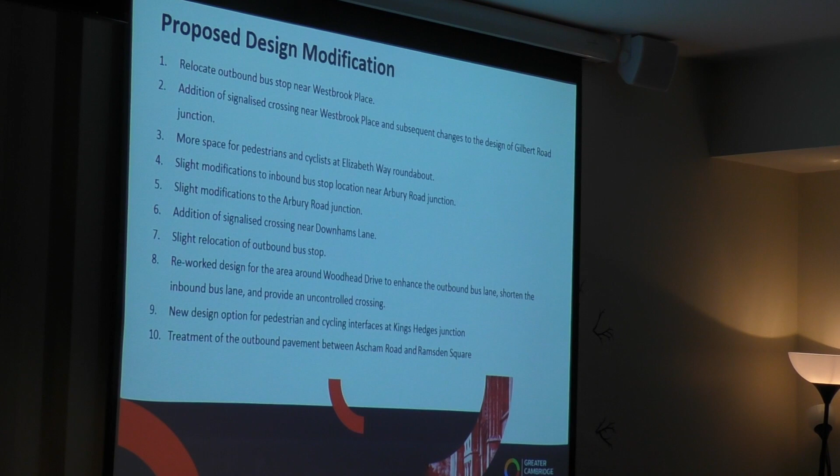In terms of the question that we asked about the location of the crossing near Westbrook Place, we got a mixed response on that, but we've had a lot from the discussions. We decided that it is advantageous to put a crossing in that location, so the design team tried to do that, and you'll see that on the plan.

A big point that was raised was regarding the Elizabeth Way roundabout and giving more space to cycling and pedestrians around the edges of the roundabout, and we've addressed that as you'll see in the plan. We want to discuss that in groups, because on one corner of the roundabout it does mean we have reduced the width for traffic from 2 lanes to 1 lane.

That may have a slight impact on traffic queuing, but we'll raise it in detail when we discuss. We've got slight modifications to the inbound bus stop near Arbury Road based on driveway access, and slight modifications to the Arbury Road junction. There are a few options we're looking at, which Livio will explain in more detail. We've also got addition of a signalised crossing near Downhams Lane, as that was the preferred location for that specific question we asked.

We've had to slightly relocate the outbound bus stop in that area as well, because we found it was near a building of local interest where we placed it previously, so we've addressed that issue. We've reworked the design for the area around Woodhead Drive, including an additional uncontrolled crossing, which you'll see on the plan and be able to feed back on. In doing that, we've lengthened the outbound bus lane and shortened the inbound bus lane slightly.

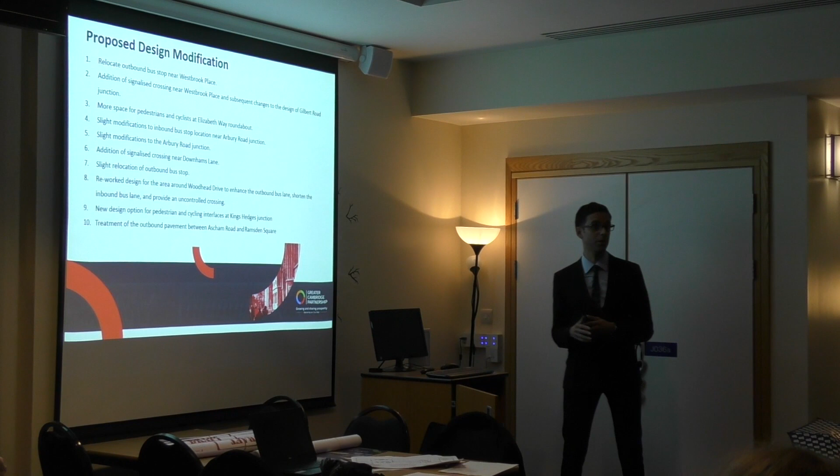Good evening everyone. Some of you might have seen me before because I attended the tree workshop, but my name is Livio Martelli, WSP. I'll be taking over the detail design stage, so I don't have the full history of this stage of design, but I'm collecting and gaining as much information as possible. I want to go through all these items that Paul highlighted.

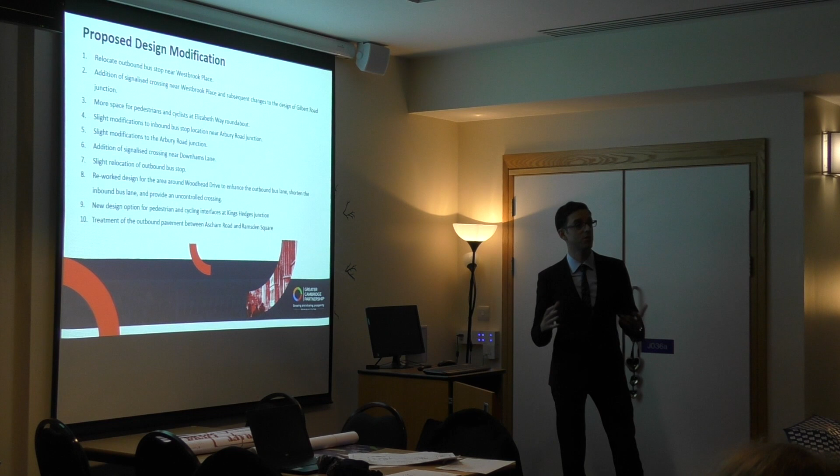But there will be changes that are effectively quite minor. They're a result of the consultation. There's not too much really to discuss, it's just more a presentation. There are some specific items I'd like to discuss with you in more detail, get your views and ideas, and that's the reason why we're going to have a separate workshop afterwards. So I'll try to highlight the specific items we want your feedback on.

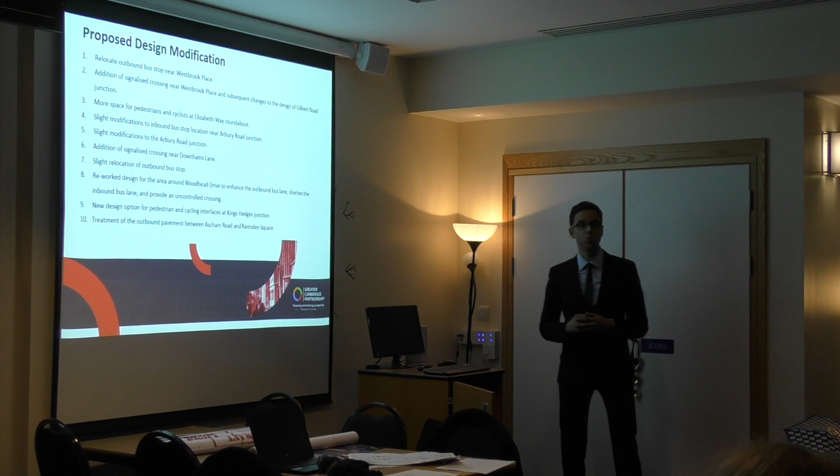So if we start from the first one, Westbrook Place. What we've done here, as Paul mentioned, we relocated the bus stop. It was to the south of Westbrook Place, and we moved it to the north. The reason why we did it was there was some strong opposition to the previous location, but the advantage from an engineering point of view is, as you can see, there are fewer accesses, so it's a better place for a bus stop.

Then we have introduced a new signalised crossing that you can see there. This is also as a result of the consultation. The crossing is for pedestrians only because unfortunately there's no space here for a toucan crossing. As you can see to the north, that's the area where all the shops are, and it's recognized as an area of potential conflict between pedestrians and cyclists. Obviously you're going to have quite a lot of pedestrians there, and cyclists have potentially other routes as well, because they could use the bus lane, or the fast cyclists could use the road. So we want to provide a facility there for more vulnerable cyclists.

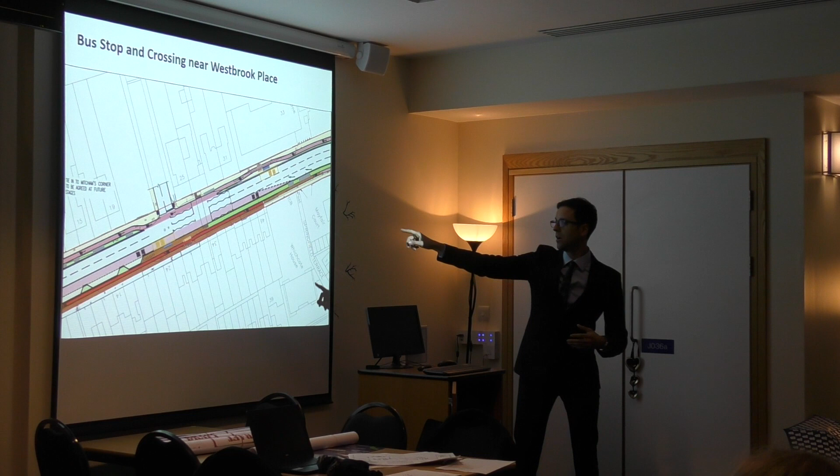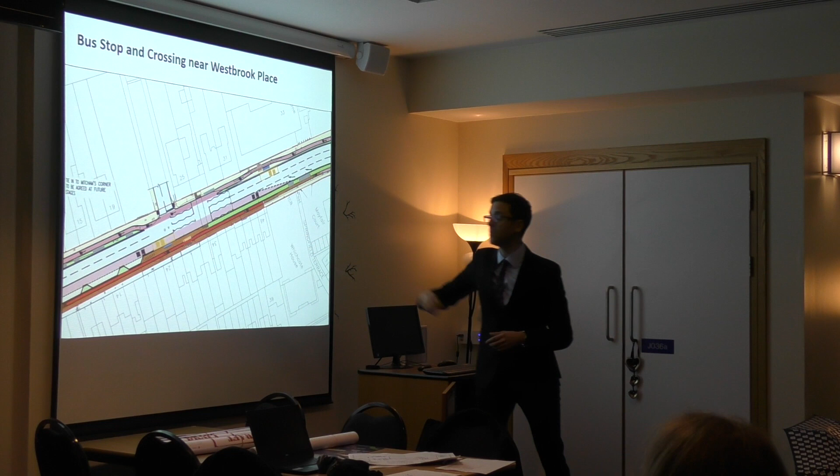So we've got a bus lane, and a cycle lane that's going to be at the same level as the footway, all in block paving, so it will be rather attractive. Could you tell us which colour symbolises what? What's the red stripe? The red here is the cycle lane. And the brown is pedestrian. So what is the red line different to the pink line? Pink line's bus.

The red line, effectively, we want to create two potential routes for cyclists. We're going to have fast cyclists at this location - they could use the bus lane if they want, because it's quite wide and most of the time you don't get buses in it. And then you've got more vulnerable cyclists at this location, who will be using the cycle lane.

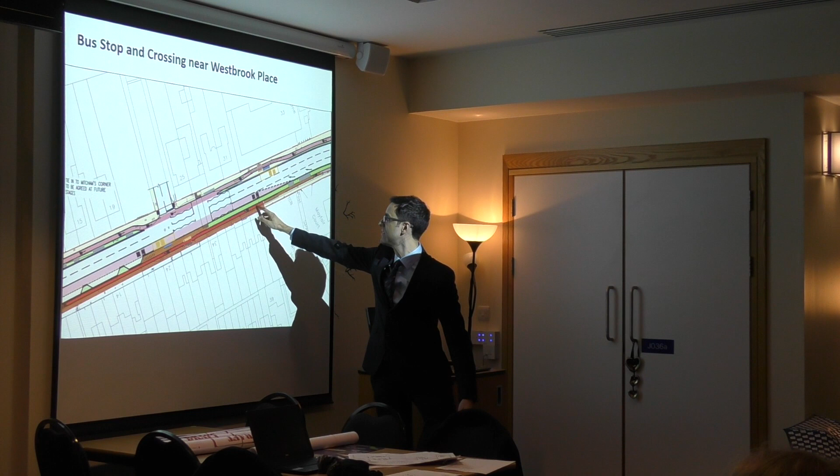So this is a different material. It's going to be block paving, more attractive and more suitable to that location. That's why it's a different colour.

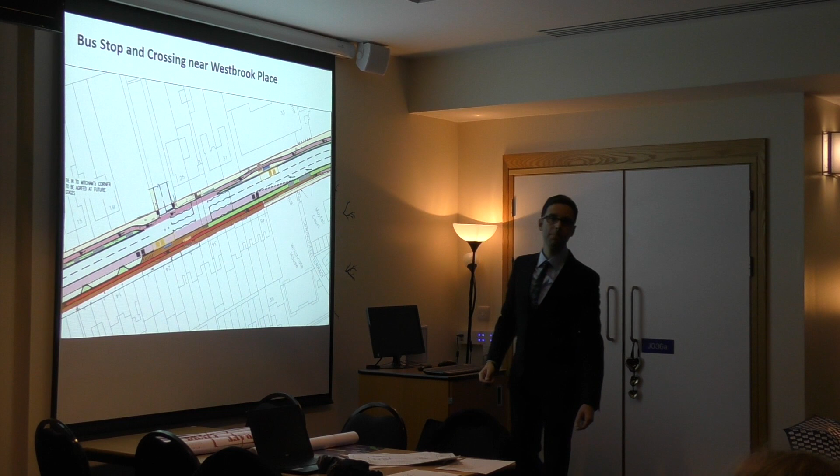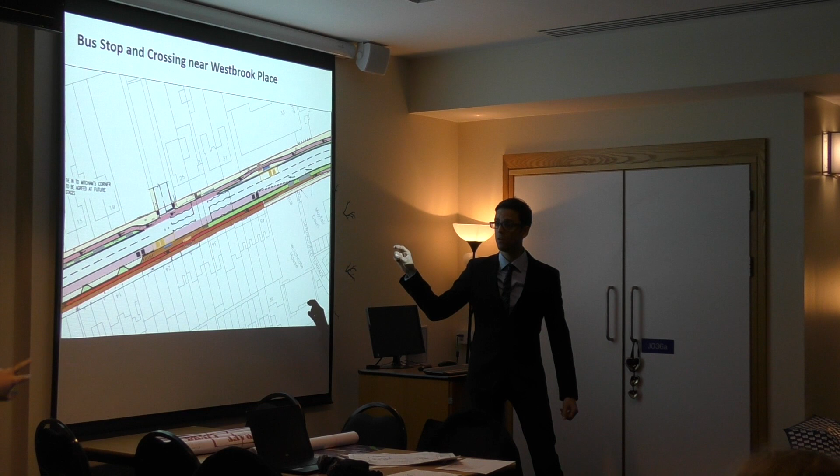What's the sort of scale? What kind of widths are we looking at in metres for these different lanes? For the cycle lane, it's about 1.5 metres, with local reduction to 1.2 at the pinch points where we have the bus stop. And is the pavement for pedestrians the same width?

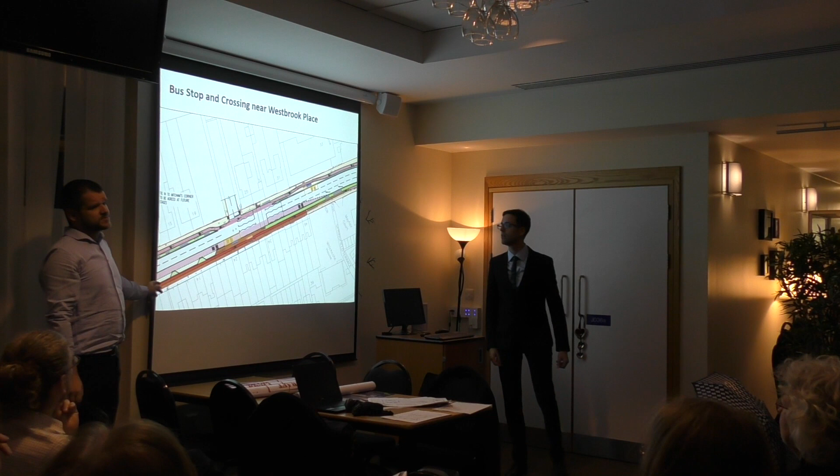Now, this is kind of different areas - difficult question, should we explain this when we get to the table? Minimum width is up to 2 metres for pedestrians, but there is the short frontage here which we cannot design on because it doesn't belong to the council - it's the highway boundary limited.

Sorry, could the gentleman speak up? We can't hear you at the back here. Can you throw your voice more, please?

So this cycle lane is on that same level as the footway. We're using two different colours because that's going to be a different material than, for example, here on the northern side. So we are going for block paving type material.

The width of the cycle lane is 1.5 metres along this section, and we have a half metre buffer zone from the parking space. The pedestrians have a minimum of 1.8 metre footway here, but there is much more space available, though we do not control this land. That's why we're showing this as a 2 metre section only at the moment.

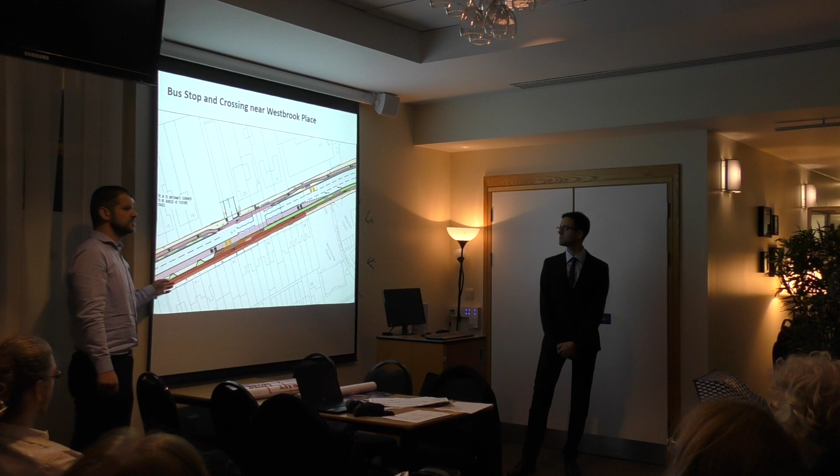So what I said is correct. In this specific area, coming down from the junction past the shops, we recognised through our discussions that this area has quite a lot of conflicts in it. You're going to have pedestrians trying to come from the shops, going to the parking spaces, people crossing the cycleway.

So we can't put a fast cycleway through this area. We need to somehow try to calm the cycleway. We're just trying to come up with ideas for this specific piece of cycleway, where there's quite a lot of conflict, to try and calm it slightly, to make sure we're not having cyclists riding down there at 20 miles an hour, for example. Which is a difficult thing to do, and it's kind of a result of switching the cycleway from the carriageway, where we previously had it between the busway and parking, which is also not ideal.

So on this side, we are achieving a cycleway which is separated from the road and is a facility for everyone to use, but we need it to be slightly calmer because we recognise there are a number of conflict points in that area. So we need to move on - we can discuss this around the tables further. We'll be walking around the tables.

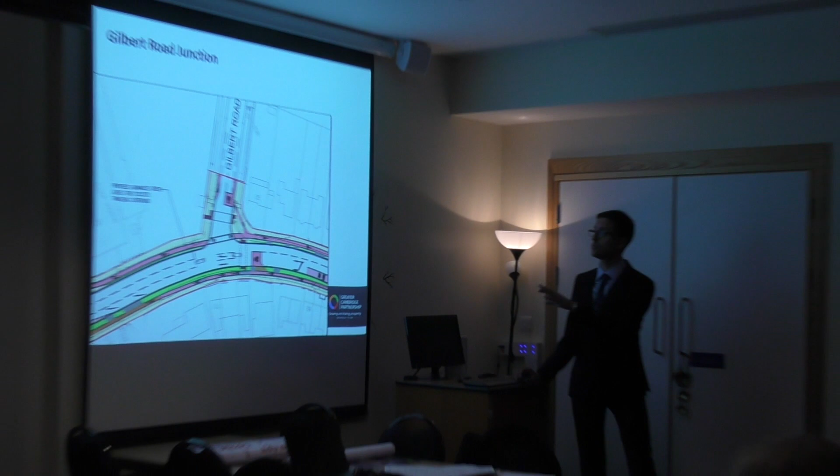Okay, so let's move on to the next one - it's Gilbert Road Junction. So the signalised crossing that we had has been moved onto Westbrook Place. This creates much more space within the junction for pedestrians and cyclists, so we can achieve a wider pavement on this side, which in the previous design was a pinch point. We have dedicated separate facilities for pedestrians and cyclists, with dedicated crossing points for cyclists and pedestrians here.

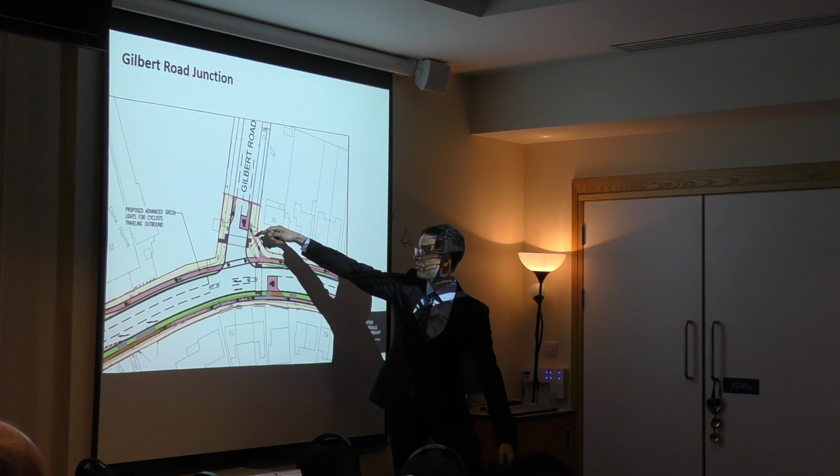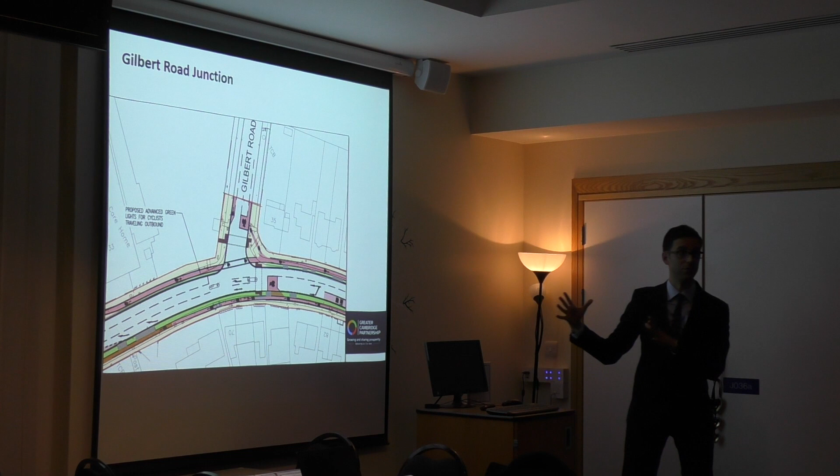The conflict areas are for pedestrians and cyclists wanting to turn left, so there's a potential conflict area for pedestrians here. We're considering some options here, so it'd be good to have your feedback on this. One of them is a shared use - having a small area of shared use for cyclists turning left.

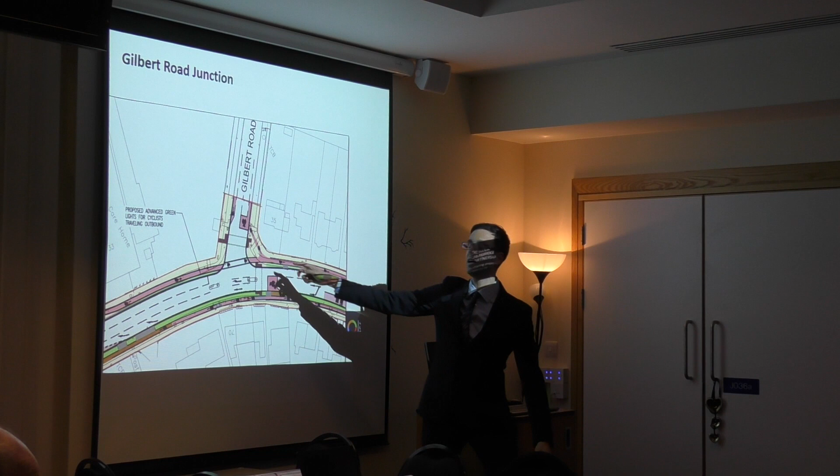Obviously, nobody likes shared use. But the alternative is having this approach here where pedestrians effectively need to cross the cycleway twice to get to the crossing. So it might be that in this situation, shared use is the best solution.

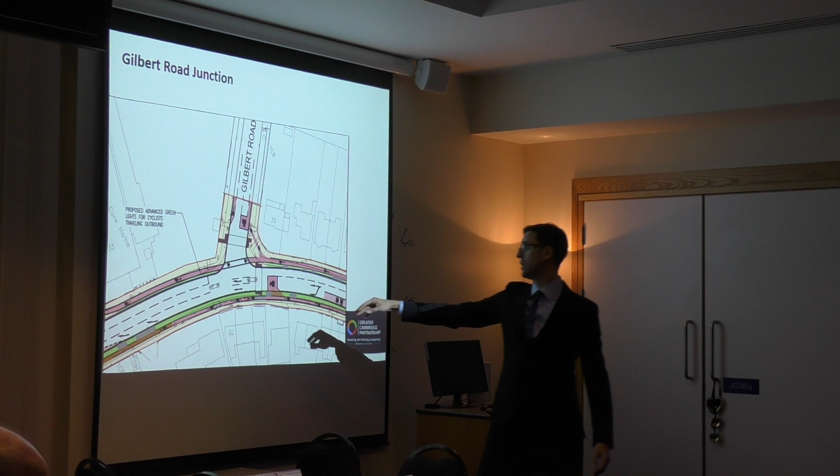But if you've got some ideas, please let us know. For cyclists wanting to turn right on Gilbert Road, they will have to join the carriageway and use advanced stop lines. Similarly, cyclists coming down from Gilbert Road will be able to join the cycleway here. It's not shown on this drawing because it's still work in progress effectively.

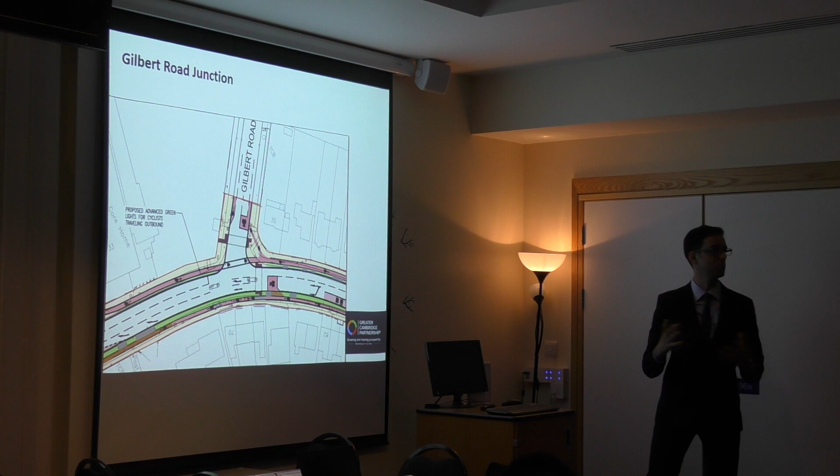So here I can only see positive improvements. I don't think there's too much up for discussion, but obviously if you've got any questions we can discuss it later.

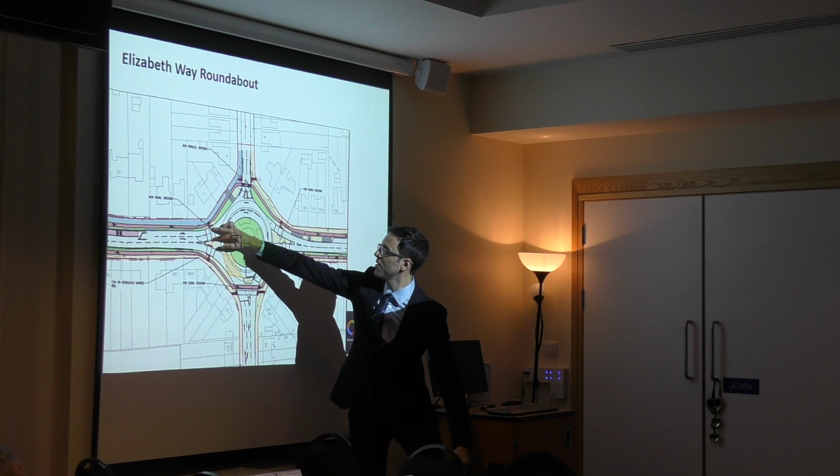Now, Elizabeth Way roundabout - the main issue was trying to address conflicts between pedestrians and cyclists. So what we've done is removed the ability for two HGVs, two lorries effectively, to use the roundabout at the same time alongside - one going straight and one turning right, which is quite normal in Cambridge. So pretty much everywhere else in Cambridge, an HGV will have to use other lanes in order to turn right. I don't think it's a major issue. We discussed it with the safety team and they accept this.

By blocking and restricting these movements, we created more space for pedestrians and cyclists because we could widen the pavements.

Similarly, we're now looking at the option of removing the left turn facility from Milton Road going down to Elizabeth Way. This would remove the pinch point at this location and allow us to have a segregated cycleway. In the previous version of the design, we had shared use areas. Now we've removed all shared use areas apart from this section, which we'll talk about later - introducing segregated facilities and segregated crossings for pedestrians and cyclists.

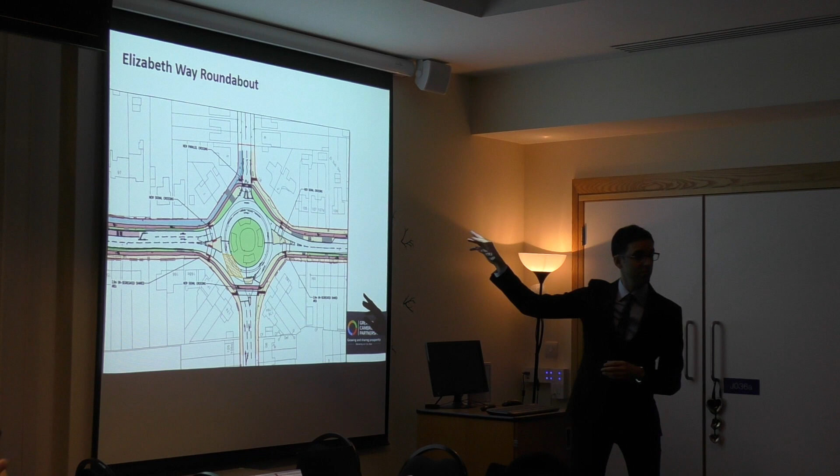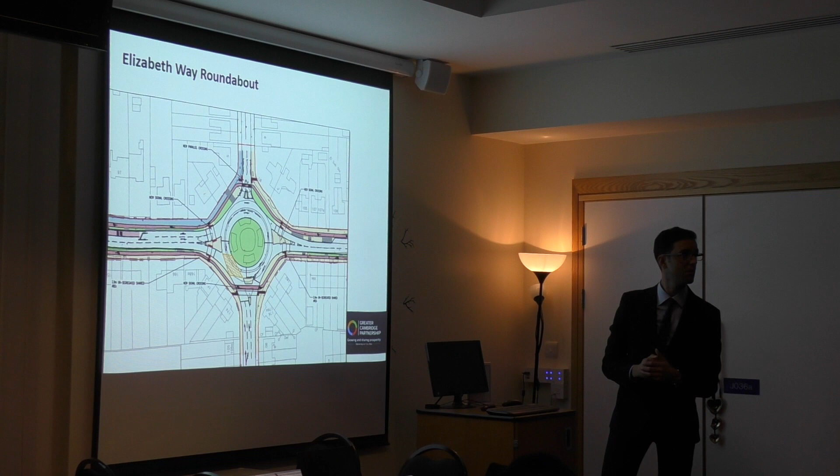We discussed this in the workshop around tables. We've got to move this through, because if we spend all our time talking here, and the acoustics aren't great, it's better if everybody is at small tables and the officers can come around and answer questions - that way we get through the information more quickly. It's important that we get a record of what people say, so keep going.

So, Arbury Road Junction - some minor changes here, nothing major. We've moved the bus stops slightly, as Paul suggested, just a few meters, and we rationalized the alignment of the cycleway.

I think the only item for discussion here is the potential interaction between cyclists and pedestrians at the crossing point. In this design we're providing separate crossing facilities for pedestrians and cyclists. However, there's a risk that if it's green for both pedestrians and cyclists, turning left might create a conflict point between the turning movement and pedestrian crossings. So we're recognizing there's a potential issue there, and we're looking at various options.

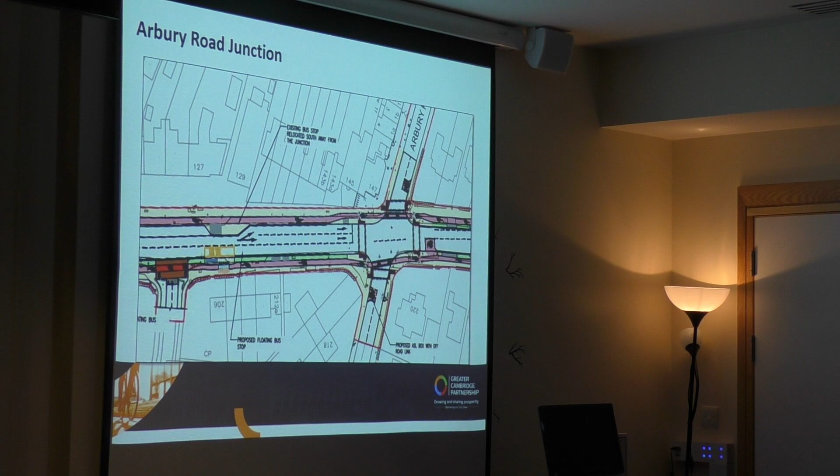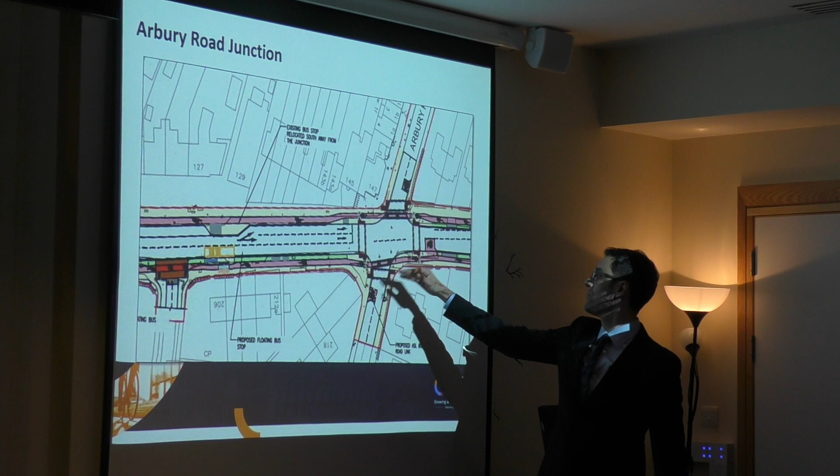One option could be to effectively block the left turn maneuver for cyclists, making it illegal. So cyclists could only go straight, and in order to turn left, they'd have to use the advanced stop line.

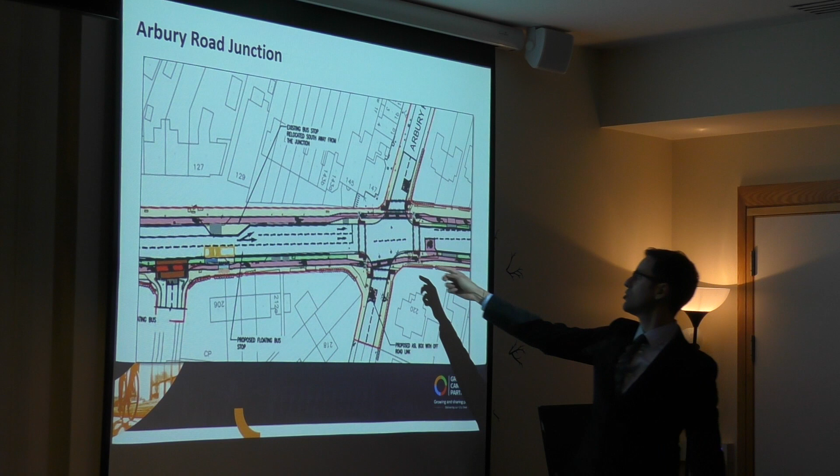Alternatively, they could use a shared use here, or the second option is to introduce Toucan crossings, effectively a crossing for pedestrians and cyclists. That way you eliminate the risk of cyclists turning left, which can have a conflict with pedestrians.

But do you mean the scramble? Are you keeping the scramble? Sorry, let's just allow him to keep going, because otherwise we're going to be here all night. We'll discuss this around the tables in a bit more detail. Please keep going.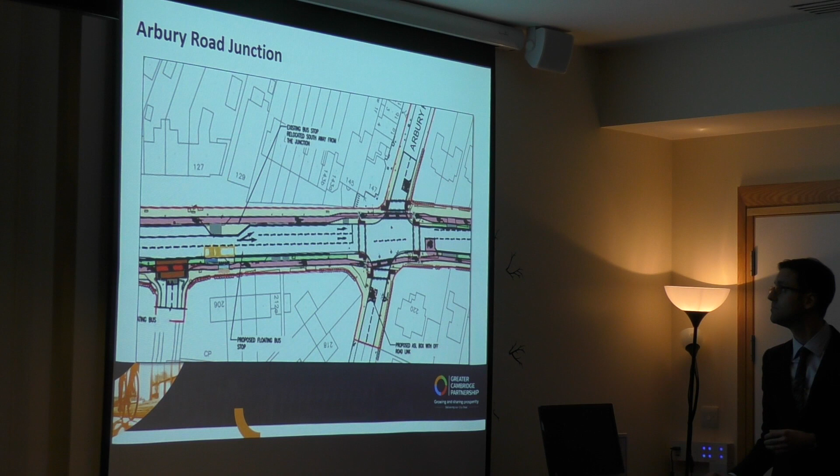On this, we're effectively introducing a new signalised crossing, as Paul mentioned, at Downham's Lane, with some minor changes to the proposed floating bus stops, as Paul discussed. No major changes other than what I just mentioned. So the new crossing at Downham's Lane was the result of the consultation.

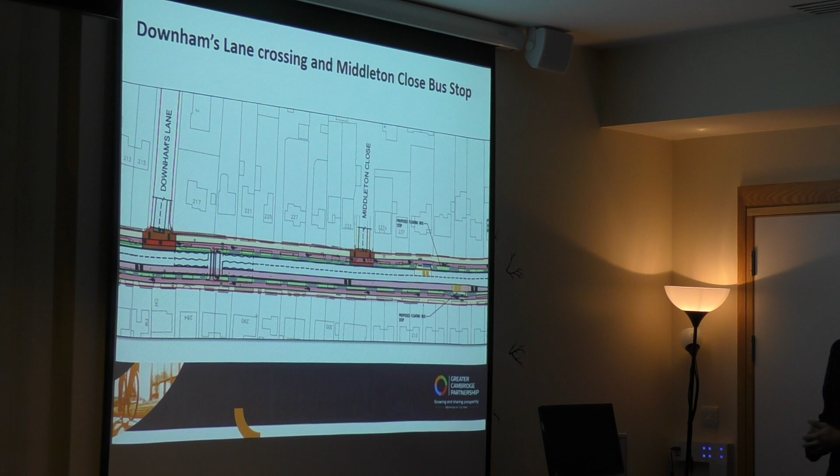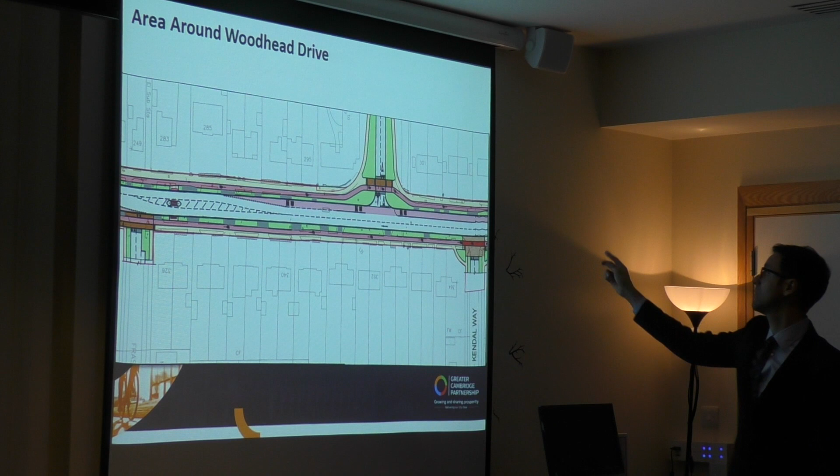And going down to Woodhead Drive, we are introducing a new uncontrolled crossing. You can see there is an existing uncontrolled crossing, and the proposed one is going to be a lot wider. By doing this, we're trimming the inbound bus lane, and at the same time extending the outbound bus lane, to improve journey time for buses travelling outbound.

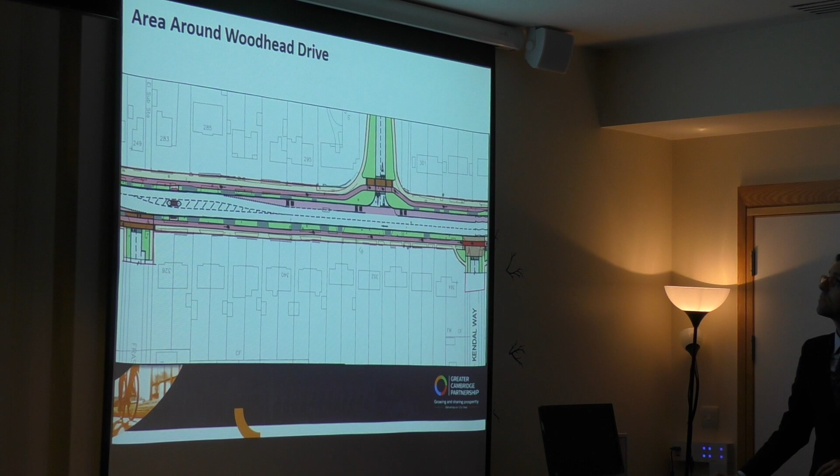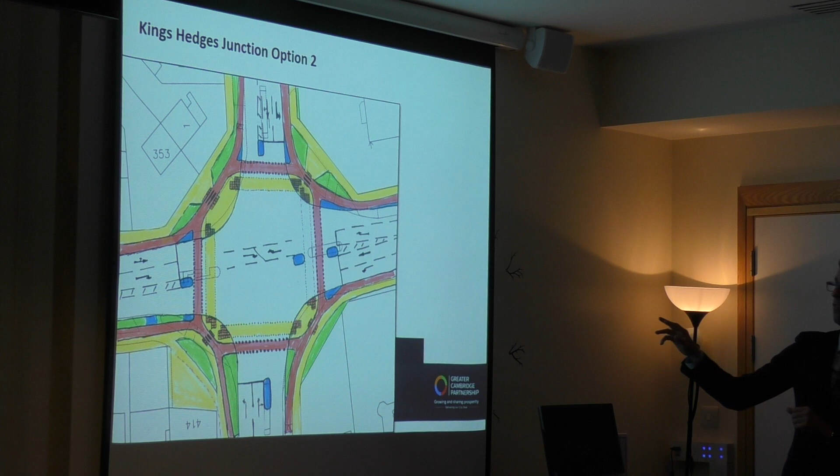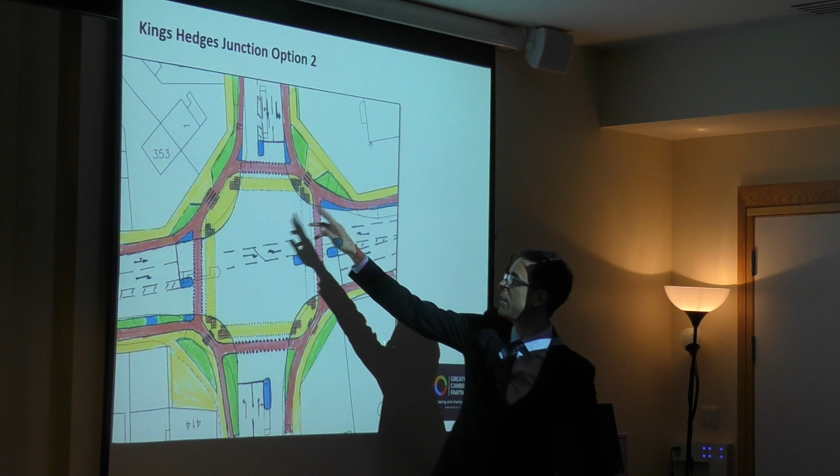You can see here the benefit of this design is that for pedestrians, in order to cross diagonally, they don't need to cross the cycleways too many times, as opposed to the other design, where you have to cross the cycleways more times. But the downside is that you increase the length of the crossing because pedestrians are crossing the inside of the junction.

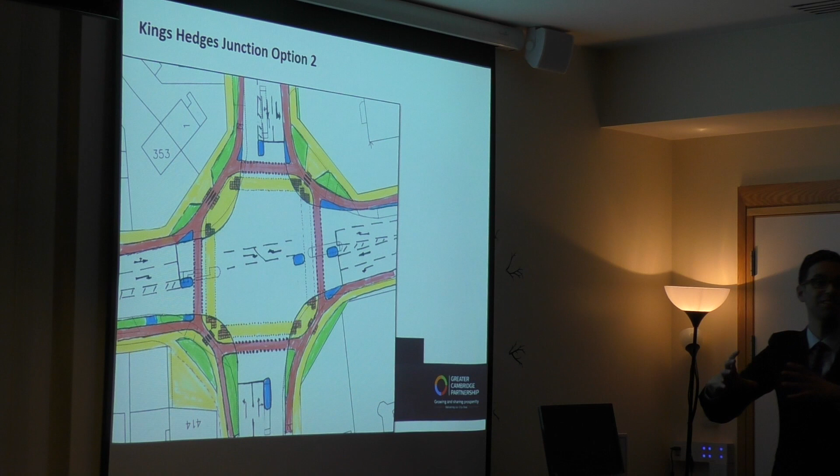The last item for discussion is the shared use between Ascham Road and Highworth Avenue. There are a number of safety concerns in relation to shared use, to do with the fact that cyclists are travelling quite close to the properties, and there are issues with visibility, and as you're coming out of a side road at a junction, you don't expect cyclists coming from both directions. So there were some safety issues in relation to shared use, and we're now considering reducing the extent of the shared use.

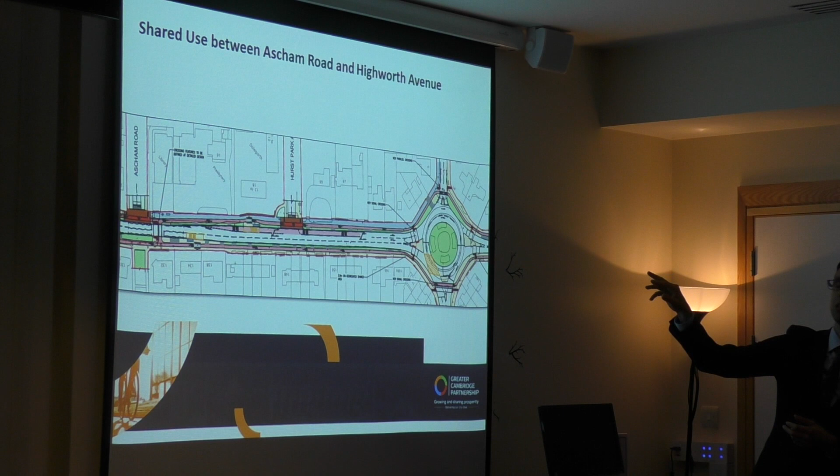Sorry to interrupt, I don't understand - the brown and the red? In the picture, the blue one is the shared use facility. We retain an outbound cycle lane, which is the pink, and then the pavement between the cycle lane and the properties is approximately 3 metres wide, a shared use pavement. So is that the greyish blue thing? And on the junction, sorry to show ignorance, but what do the red things indicate? There seem to be two red oblongs and a kind of brown oblong. They are the Copenhagen style crossings.

Let this be the last question, please. Okay, move on - yeah, I mean you can discuss. So this was the last slide.

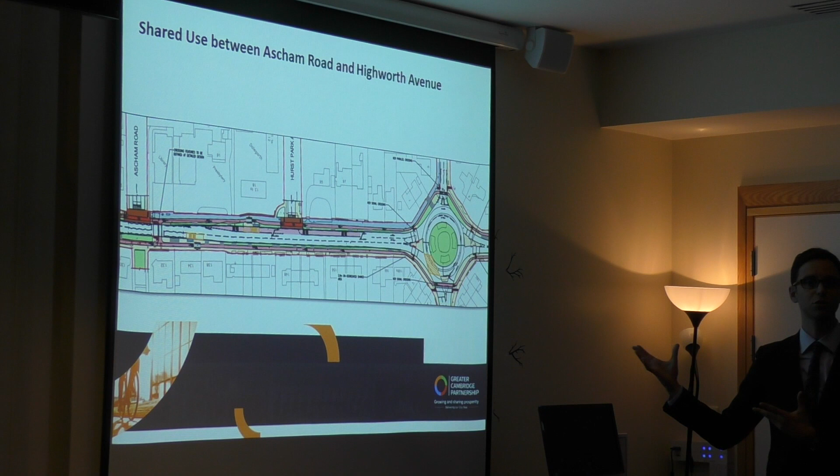It'd be good if you could try and focus, because there are many things potentially for discussion, but most of this was a presentation of where we got to, an explanation of what we did to address the designs. Some elements still need to be discussed and decided. So if I can get your view particularly on these two options for the King's Hedges junctions, because we haven't decided it yet, and on your view on the shared use area as well, to Ascham Road. It would be good to get your view on the type of crossings at the junctions I discussed earlier, and the potential interactions between pedestrians and cyclists.

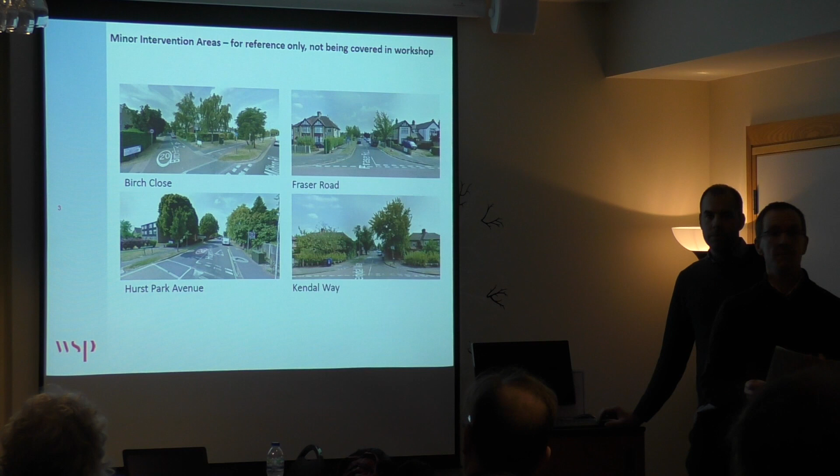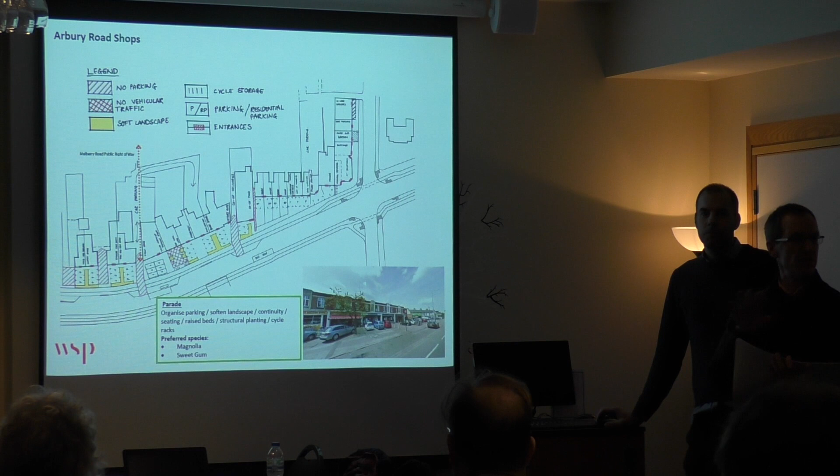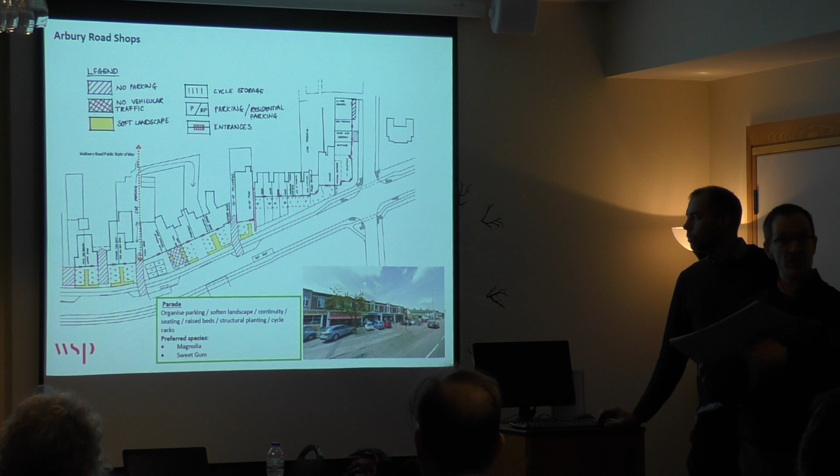There's a third category of landscape areas, which is not part of this workshop, but we thought we'd advise you that we are working with the Arbury shopkeepers and landowners, and subject to their buy-in, have produced a preliminary landscape design that will provide enhancements to that area and try to rationalise what's currently quite a broken up and disparate set of arrangements of all different shops. The idea is that that will tie in seamlessly with the public realm design, so that there aren't any forgotten little spaces between cycleway, pedestrian, and the thresholds of the shops, for example. So that will all work as well.

Coming on to the site-wide objectives, the avenue of trees along the entire length of Milton Road has been subject to considerable previous consultation. The green boxes on all of these slides are the summary of what our understanding is of you as the stakeholder, what your preferences have been to date. So we're taking those on board, combined with the latest engineering designs, to come up with our proposals.

One of the things we'll particularly be looking for your feedback on is the overall choice of species. We've put 2 groups of species based on where we're looking closer to the city centre - there'll be one group of species - and then where the carriageway is wider, we've got more room for larger species. That's the broad distinction between those 2. Hopefully those lists will be familiar to you from those of you who've been in the previous workshops.

We're hoping that will become a defining characteristic of Milton Road. We're proposing that the colour scheme for the landscape materials will be warm dark tones and a matte finish, partly because we've noticed that lighter tones can start to show signs of wear quite quickly. That was one bit of feedback that I picked up along the way.

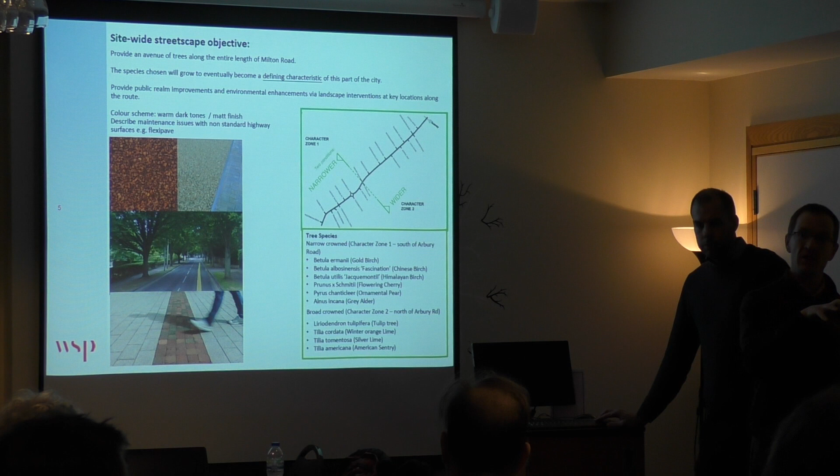That surface will be laid down over those to allow irrigation and aeration and promote the health of both existing and proposed trees. However, please be aware that those interventions are likely to be a small percentage of the total length of footway or cycleway along the entire route, and will be targeting specifically around trees that are potentially within a metre or 2 of the trees.

We've got an isometric section to illustrate the kind of tree protection measures that we think are appropriate. In this case, we're suggesting a product produced by a company called Green Blue Urban, which is a soil cell system that reduces compaction of the soil and promotes health for tree roots, aeration of the tree roots, and also allows easier irrigation. You can see on that cross section at the bottom how that could be laid under the cycleway and footway so that the rooting zone is not predominantly lateral along the green verge, because we feel that might affect the overall stability of the tree if the roots are growing laterally and not allowed to spread in as many directions as possible.

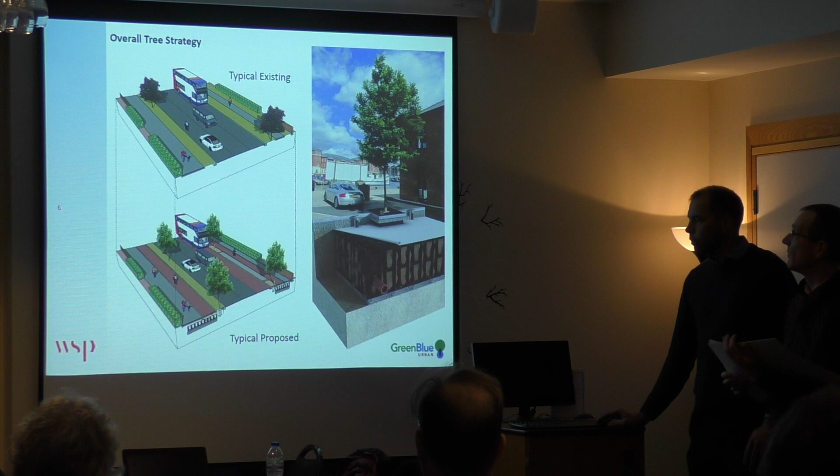The first intervention area, we took on board what you said about a book theme, potentially providing some seating, and some of the other precedents that we looked at.

We identified the importance of the scholar tree, Sophora, I think is its Latin name. These trees are dotted around Cambridge, but this one particularly provides such a strong character already. The design we've come up with seeks to enhance that rather than replacing the tree or planting other trees in proximity to it.

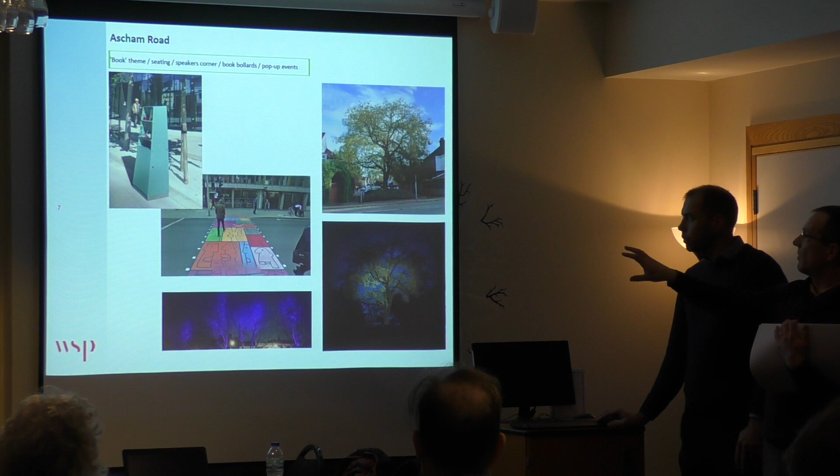We've also considered potentially uplighting the tree and using certain treatments that might make that space a destination in its own right, rather than two sides of the road segregated by a busy highway. That's just an example of that.

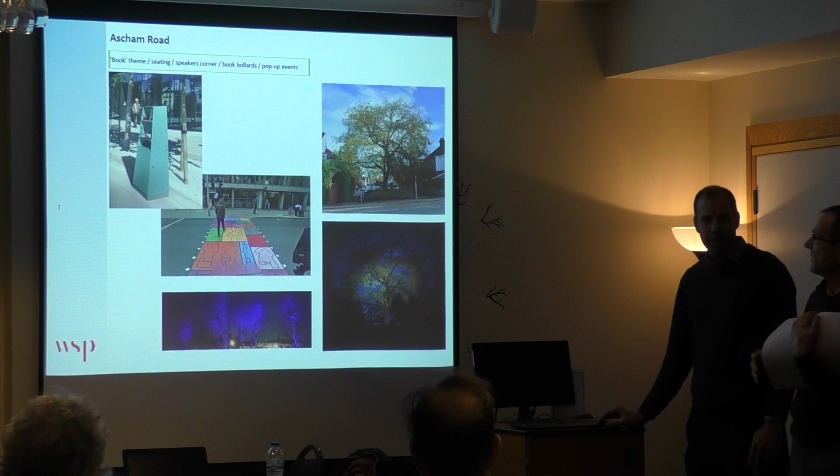So, subject to discussion tonight, the crossing pattern is an example - that's I think near the Tate Modern. That was the landscape design for that, where we've come up with a way of unifying the space. The multicoloured crossing shows the spine of some books, with the theme of the scholars.

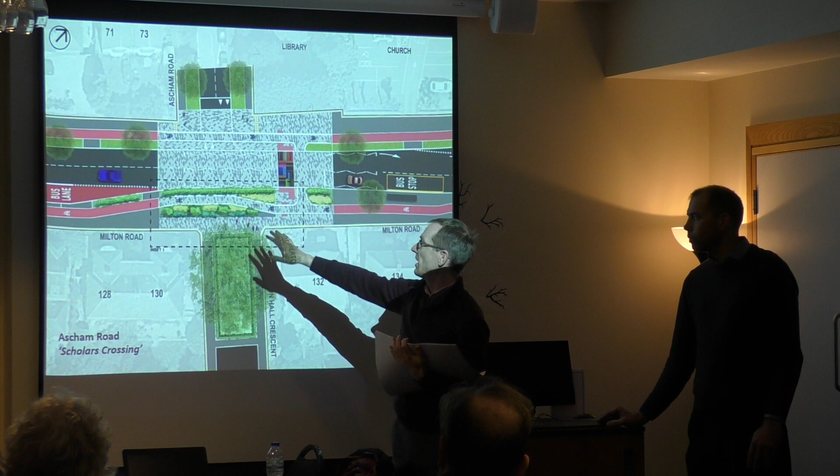We've come up with two options for this, and we're hoping you will choose one or the other. The major change you'll see in the handout is a slight deviation in the cycle route to enhance this space. So there's a segregated cycle route option and a non-segregated option which runs straight through there.

We're also hoping for your input into looking at where seating could be provided in this design, and potentially other bits of street furniture that could include locations for public art, cycle storage, and such like.

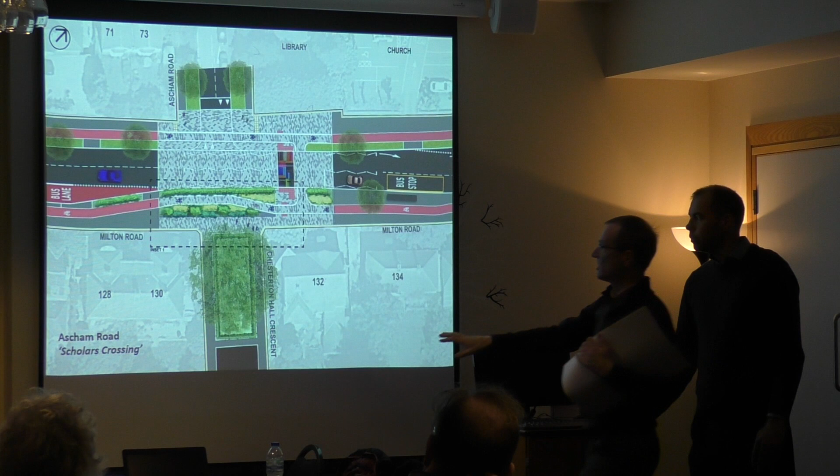Our proposals for the bed underneath the tree - currently a dwarf wall with rather overgrown, scruffy looking shrubs on it - is to provide a hedge with very small leaves, such as yew, which can be closely clipped and maintained at different heights, potentially unifying the space by being allowed to grow to the same height. It would be a trick of the eye.

Because at this point you've got a wall that needs to be quite high, whereas at the other end it's just a really low wall, so the hedge could become wide and high all the way through, with the advantage of also screening the ground underneath the tree.

We don't know how well, if we were to plant the hedge in future, it would grow because of the shade. But if you did plant the hedge right around the edge, it could be successful.

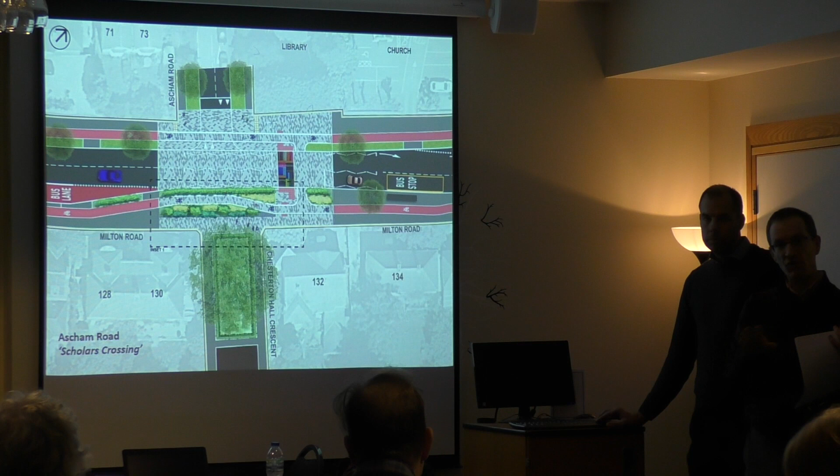We're also suggesting that the existing shrubs in that area are completely taken out, and that area is just grass below them. But we'd also suggest that underneath that hedge we plant some non-vigorous ivy, and perhaps some other bits of ground cover, just to neaten the overall appearance and potentially colonise that grass space.

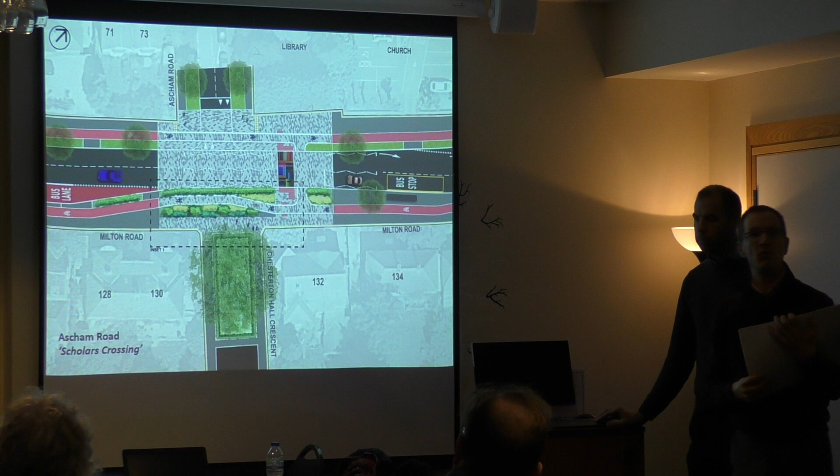So that we can identify which species are the most suitable for that area - if the grass doesn't take, perhaps the ground cover and ivies will at least cover over the bare soil, improving the whole appearance of that area.

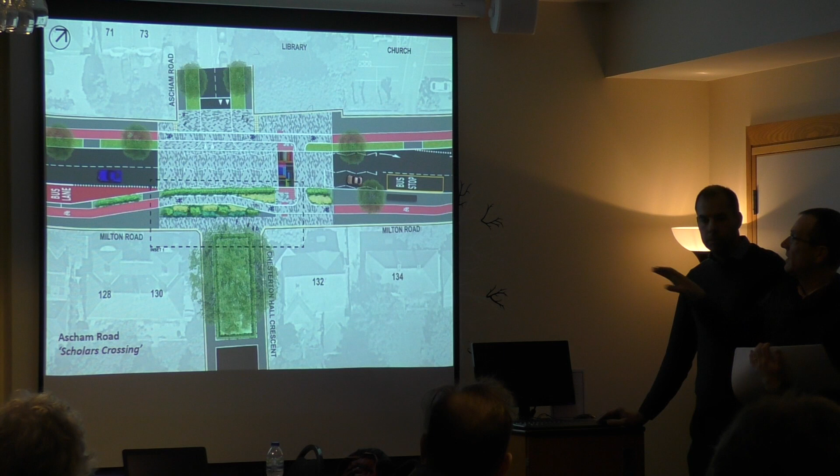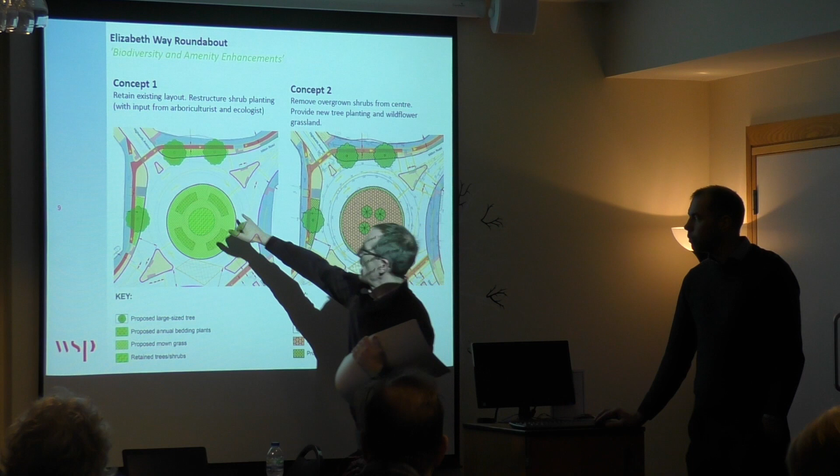We've just about made out the previous beds of annual plants placed there and the internal area, shrinking it down so the geometry is quite formal and symmetrical. The only change in Concept 1 would be to restructure the shrub planting in the middle of the roundabout, in consultation with arboriculture and ecology teams, to ensure it has the best value in both those areas.

That may be as simple as thinning out a few specimens, or working out the life expectancy of the shrub planting there. Because we haven't been in there, we don't know what we've got, but we know it has biodiversity value, and that's feedback you've given.

Concept 2 is quite a radical redesign where we're taking out that shrub bed and planting some multi-stemmed trees in its place, and providing wildflower grassland across the roundabout, apart from a strip of mown grass right around the edge. That would have biodiversity benefits as well as reducing the maintenance burden of the annual bedding plants and the grass mowing.

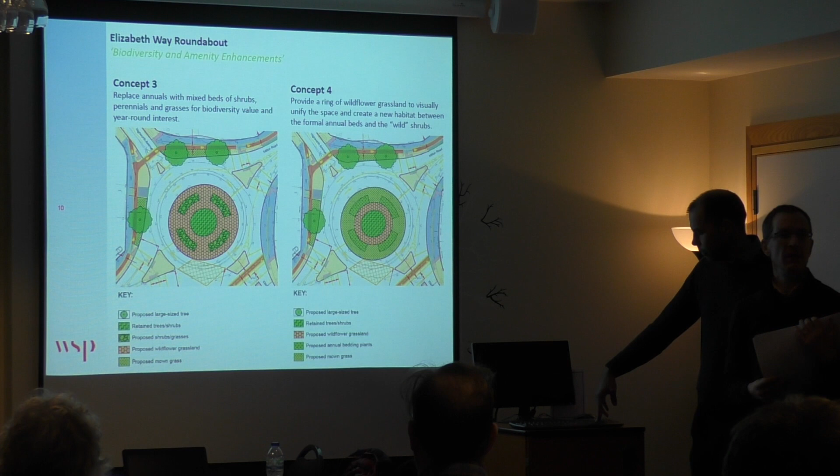And then concept 4 is providing a transition from the informal shrubs that are currently in the centre, using a ring of wildflower grassland around those, and then giving way to what the current situation is with the annual beds and the mown grass. So that's a mixture of all the other 3 concepts.

If people didn't hear, what Dorcas said is that there's an organisation called Redgate that sponsors the flowering plants on the roundabout. She believes they take care of the maintenance, and they come at regular intervals and replant and so forth. So the proposition is that the designers should be in contact with Redgate so that they're taken into account in terms of whatever happens for the planting around the roundabout.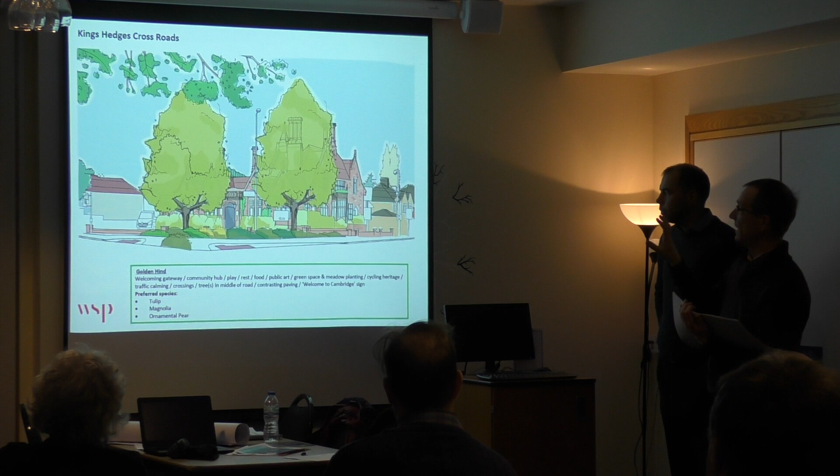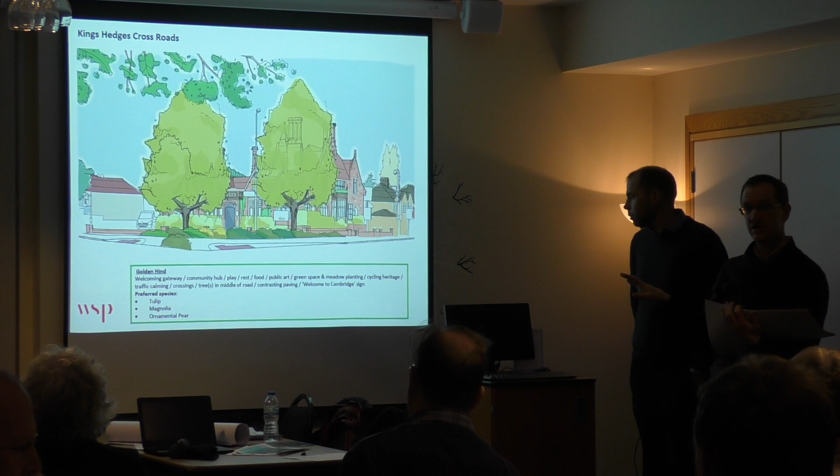The proposals for the King's Hedges crossroads are to plant some large, or even very large species of trees that could provide a really interesting, magnificent setting for the lovely architecture there, and the same pattern could be reproduced all 4 corners of the roundabout, and we're looking for you to choose species there from the list that you've seen on the previous slide. All these slides will be distributed, so you'll have all of these slides, and we've taken on board the previous comments about potentially having tulip trees there.

So we're asking you to think about whether those 2 trees should perhaps be the same species, different, or which combinations thereof.

Woodhead Drive, we've come up with a layout. Again, we've taken the engineering design, and our role primarily is to look at what species are most appropriate and how those verges will be treated. So in this case, we're suggesting that the 2 long verges up Woodhead Drive itself are effectively planted into swales, so they'll have a dish profile and can potentially take some surface water for irrigation and cleaning, improving the quality of the water that goes into the drainage system through infiltration.

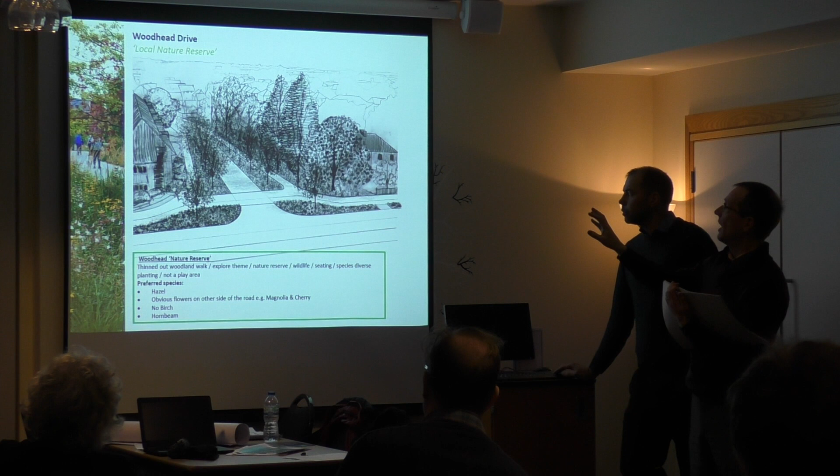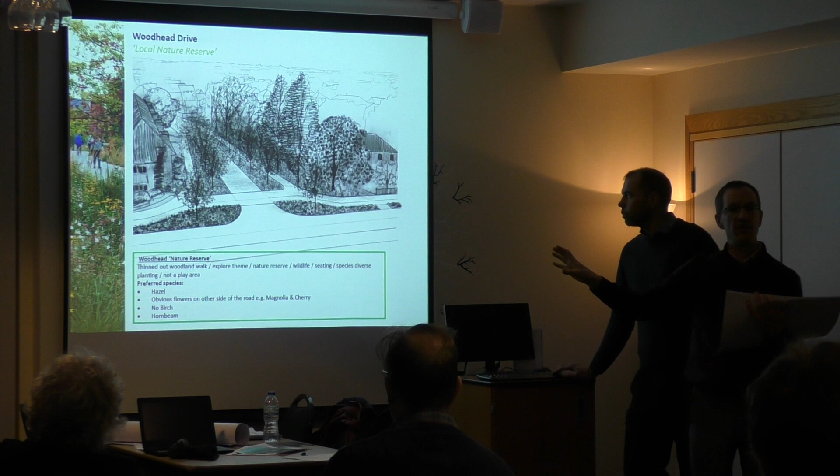We've got quite a formal avenue of trees, and we're seeking your choice as to whether on this side of the road, the south side, smaller, more ornamental species might be more appropriate to provide a better setting for the small scale planting that we see outside of those flats currently. It could be quite an abrupt transition to a more formal avenue with some more upright, larger specimens, and that is the choice that we're suggesting there.

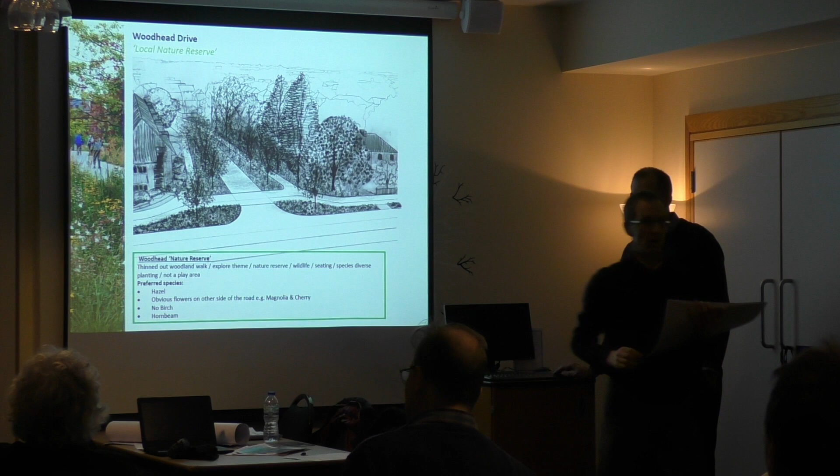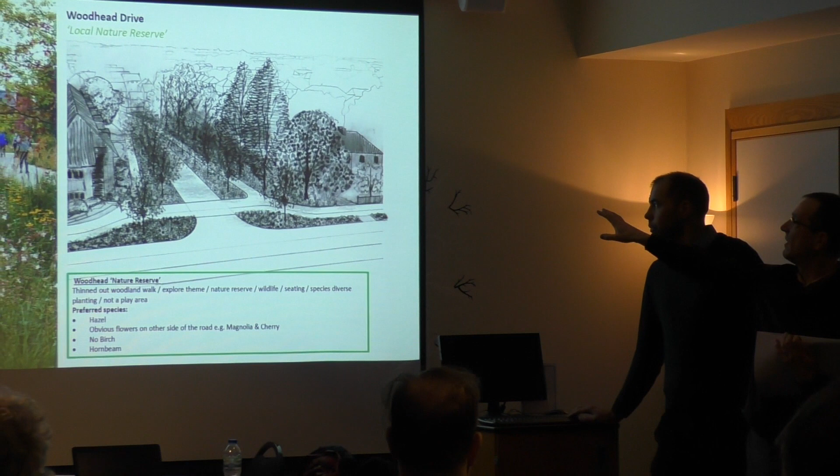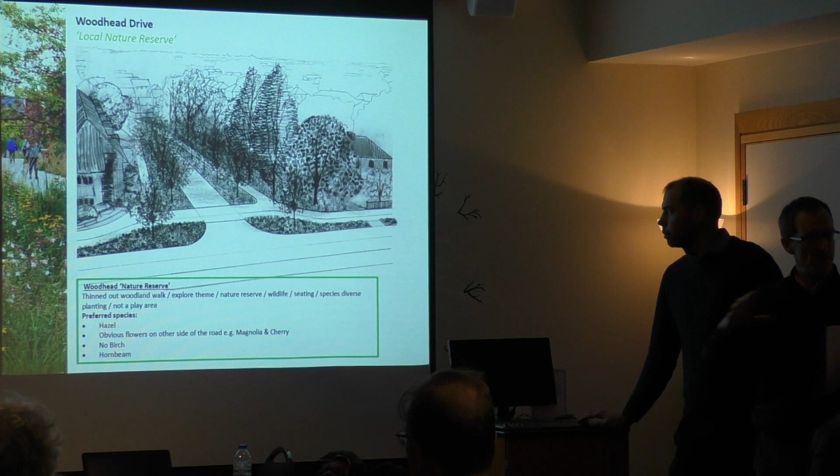What we're also proposing here is that the existing quite overgrown woodland area is treated rather like a local nature reserve, to enhance the biodiversity rather than public access. We're not going to be encouraging public access into there, so some structural planting, if necessary, or thinning out, and minimal intervention there. Generally tidying up and taking on all the comments. I think there were concerns that could potentially promote antisocial behaviour in there, because it could be seen as an area that people can get to where they're not seen. So it might be better if we maintain clear stems around some of those trees rather than a massive thicket planting. And that's the plan for that area.

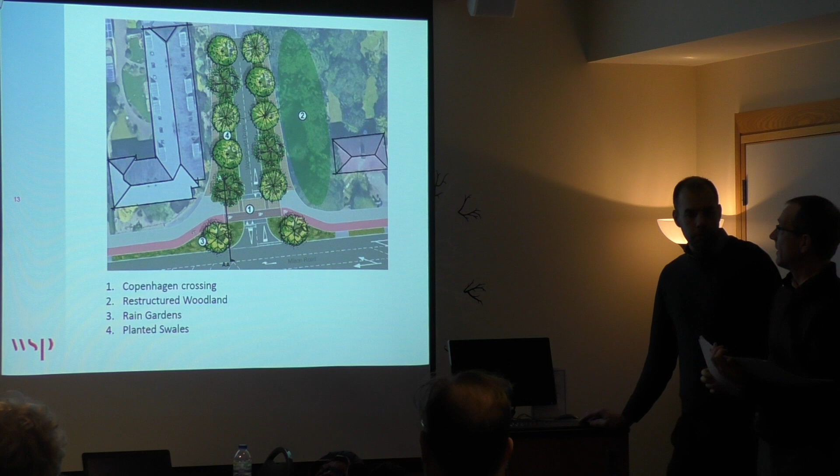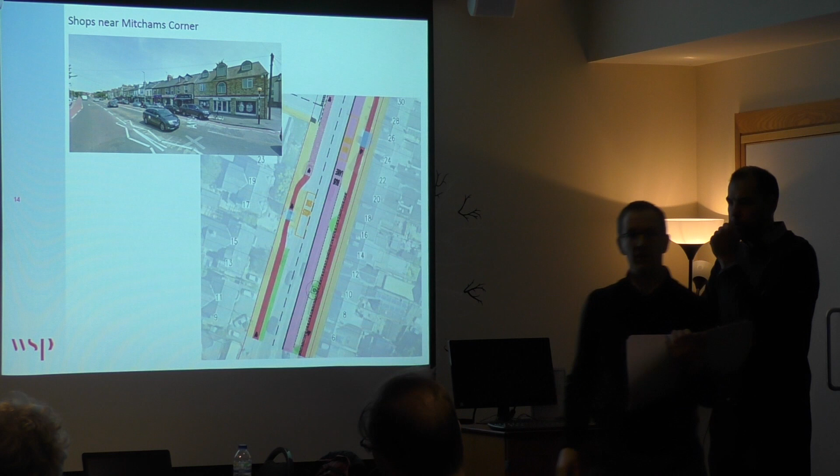And that brings us to the final area, which is quite a simple exercise where you can choose for the parking in front of the shops at Mitchams Corner, whether the current design, which has three build-out areas, green verge areas, whether we should maximise the number of trees that are planted there, or on balance choose to have more parking and less trees.

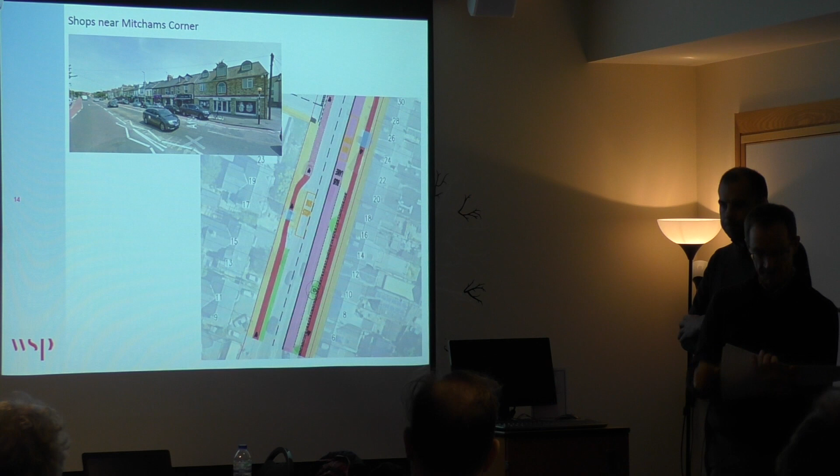What sort of size were these trees whenever they were planted? What size of stock will we be planting? Normally, throughout the city, we try and get containerised stocks if we can. They are normally between 3 and 5 metres tall. And then we look at stem diameters, which is taken at a measurement of 1 metre high, and we kind of go 10 to 12 centimetres, sometimes 12 to 14. So they're going to be a reasonable size that'll have good coverage.

They have to be really, yes. Because they've been planting little trees around Milton Road for years. Can you confirm that none of the Tilias are the dripping variety?

Yes, that's right. So especially one of them, the Tomentosa I think. The good thing is apparently aphids don't like furry underside leaves, and the Tomentosa has a furry underside leaf, so you don't get honeydew.

The other thing about Tomentosa is they're really good in high temperatures because they flip their leaves over and show a silvery underside. So when the wind blows on a hot summer's day you get this flash of silver. They're a very robust, tough urban tree that takes all sorts of horrible things we do driving our vehicles past.